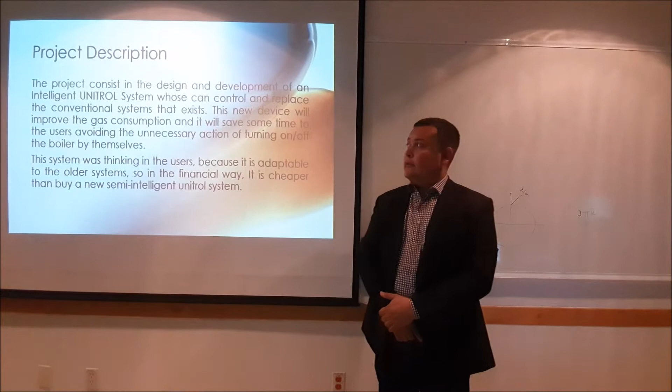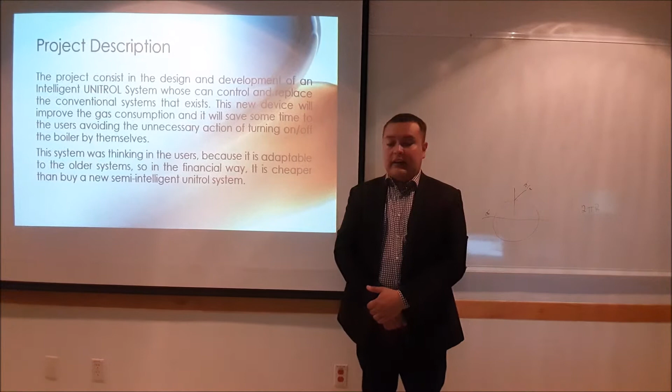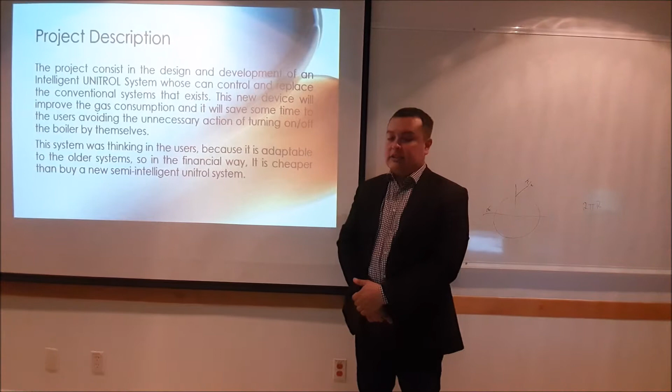Okay, first of all, we are gonna talk about the project description. What does that mean? This project consists in the design and development of an intelligent UNITROL system, which can control and replace the conventional system that exists. This new device will improve the gas consumption and it will save some time to the users, avoiding the unnecessary action of turning on or turning off the boiler by themselves.

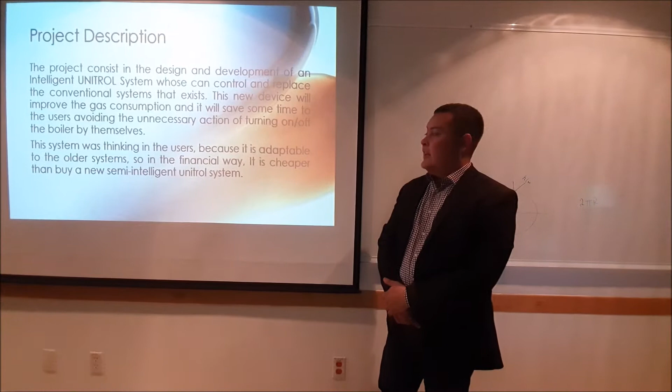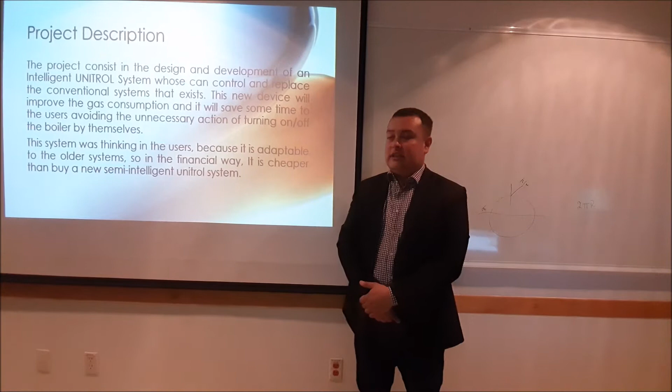This system was thought for the users because it will be adaptable to the older systems that already exist in the market. So that means that in the financial way, it will be cheaper than buying a new semi-intelligent UNITROL system.

Okay, we have different objectives in this project. So the main objective that this project has is the improvement of the UNITROL system for the population. That means that we have to make the old UNITROL systems into an intelligent one. And how are we gonna do that? We are gonna control the system with a mobile device. Actually, that was another objective. Another objective is to learn how to generate energy from the temperature differential.

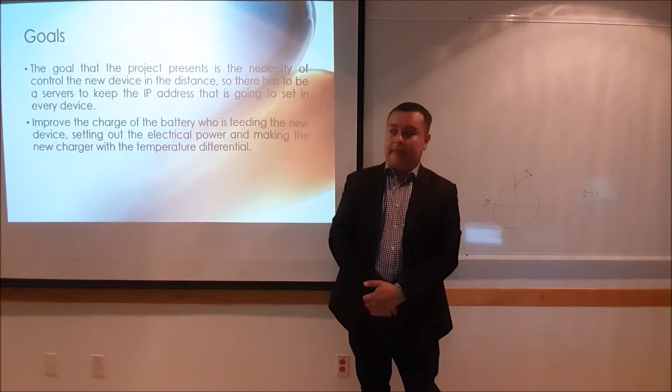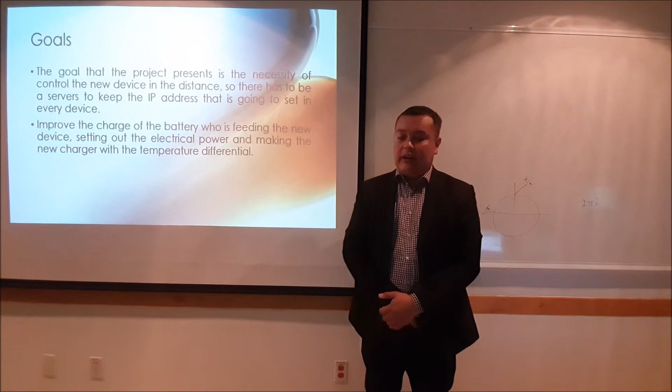As we have objectives, we have goals. So the goal that this project presents is the necessity of controlling the new device at a distance, because we can control this system in a local way. But if you want to control it from another country, you are gonna need an IP address. That IP address is gonna be given to the new device, and it will control the entire system.

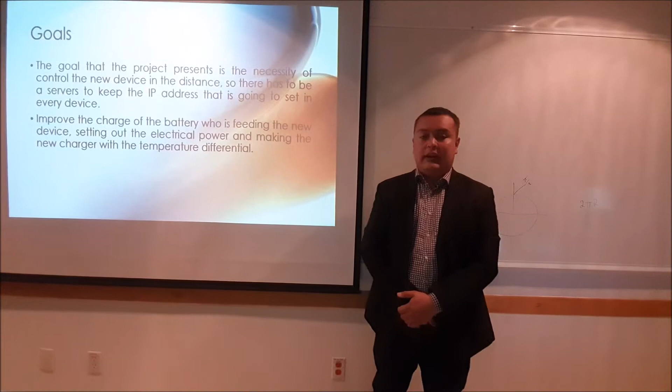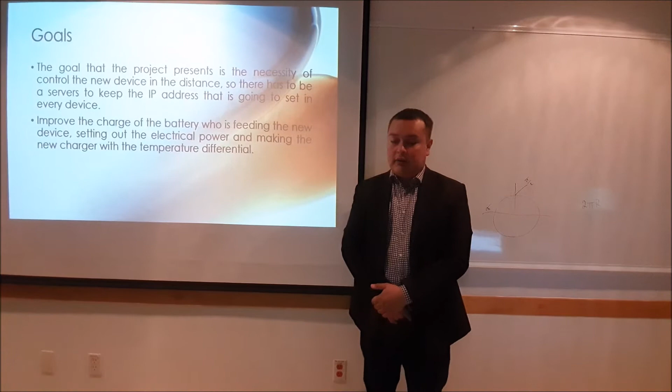Another goal is to improve the charge of the battery which is feeding the new device, setting out the electrical power and making the new charger with temperature differential.

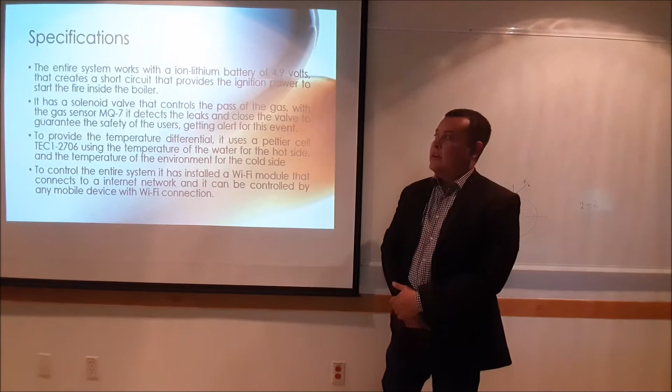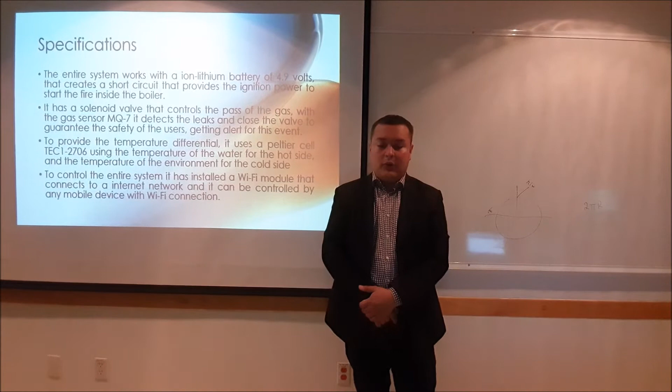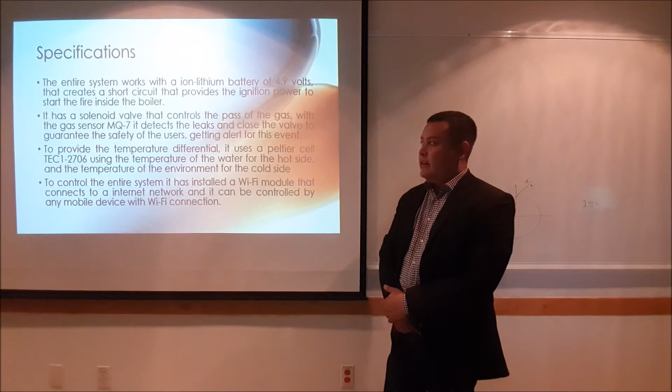So, what about the specifications of this project? This entire system will work with a battery. This battery is gonna be a lithium ion battery of 4.9 volts. These 4.9 volts will create a short circuit that will provide the ignition power to start the fire inside the boiler and start heating the water.

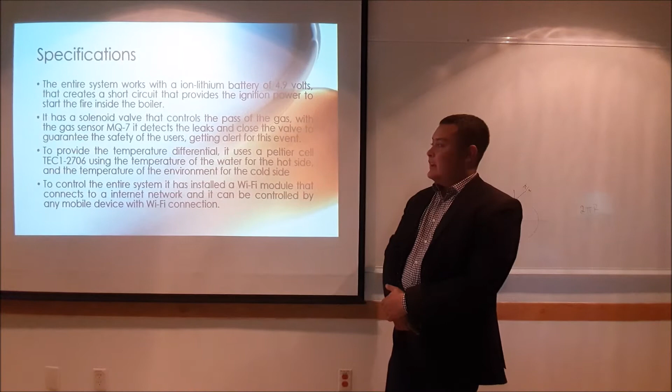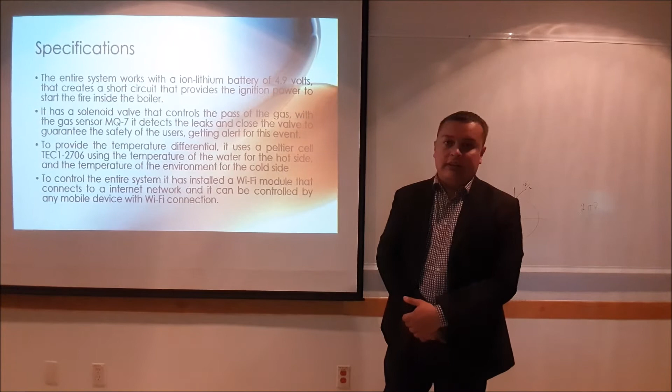It has a solenoid valve that controls the passage of the gas. With the help of the gas sensor MQ7, it will detect leaks and close the valve to guarantee the safety of the users. Then the system will notify the user that there was a leak in the system.

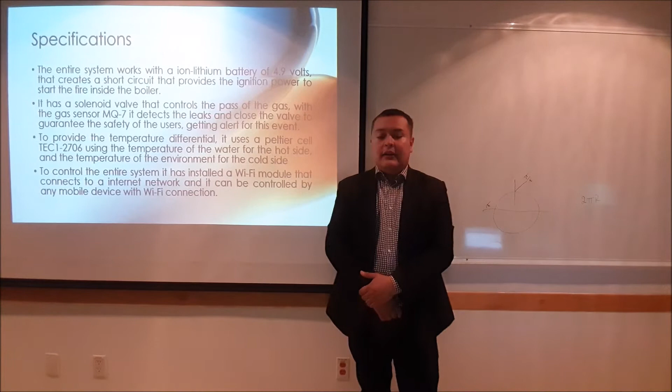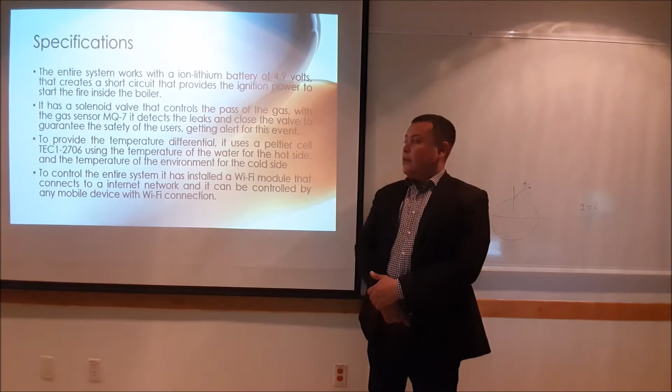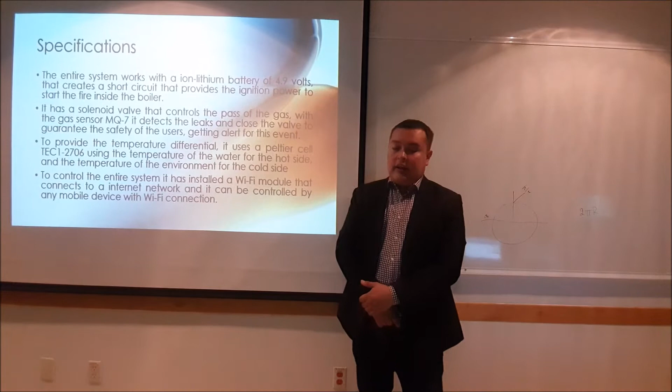To provide the temperature differential, we are going to use a Peltier cell, the TEC1-12706. Using the temperature of the water on the hot side and the temperature of the environment on the cold side will create the temperature differential. To control the entire system, we are going to install a Wi-Fi module that connects to an internet network, and it can be controlled by any mobile device with Wi-Fi connection.

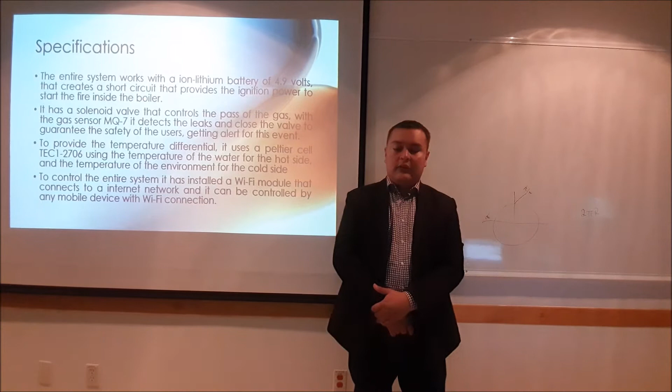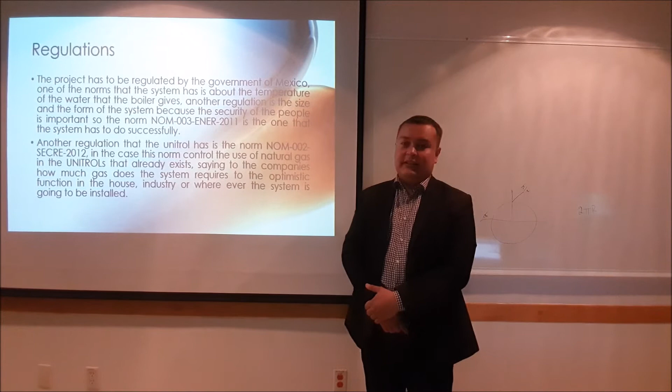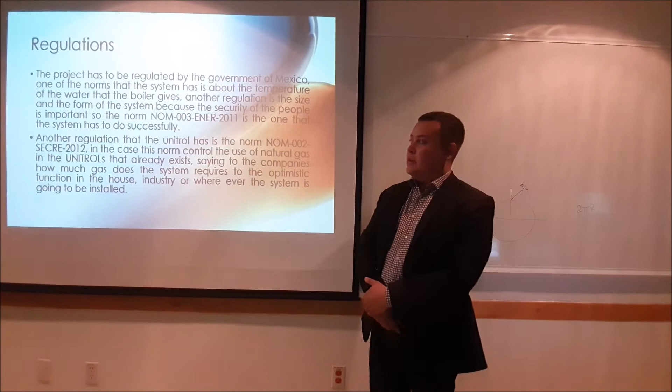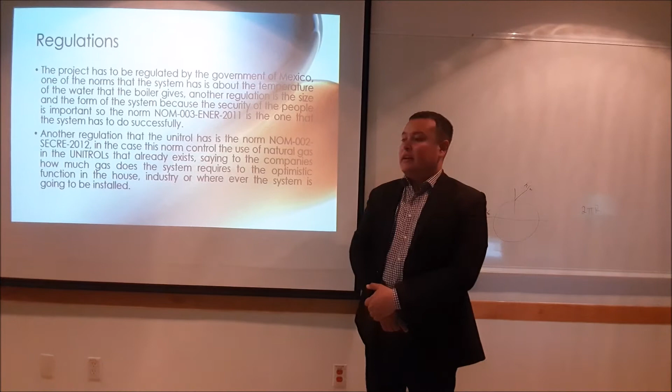Every single project that you are developing has regulations. Our project has a regulation by the government of Mexico. This is regulated by the NOM-003-ENER-2011. What does this regulation say to us? This regulation controls the temperature of the water, because the boiler has to give the users a temperature that is normalized by this norm. Also, this norm controls the security for the people that install it in their house.

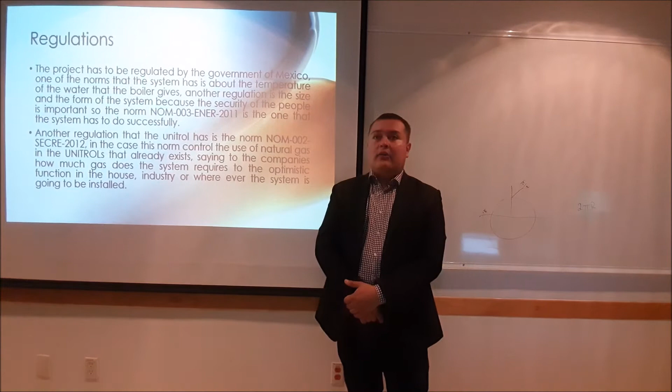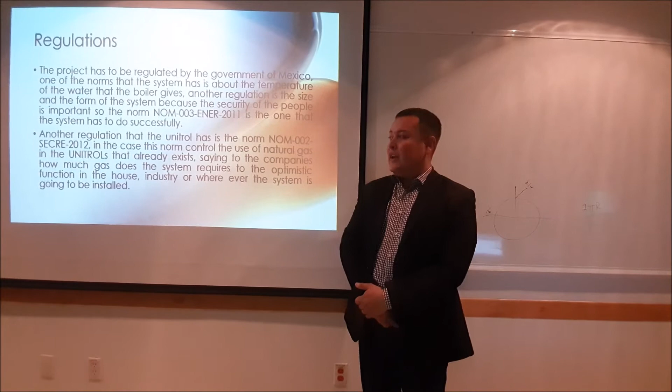Another regulation that we have is the NOM 002 SECRE 2012. What does this regulation say? This regulation controls the use of natural gas in the unitary systems that already exist in the market. So, this regulation tells the companies how much gas the system requires to work optimally. So you can put some gas in your house and another quantity in the industry.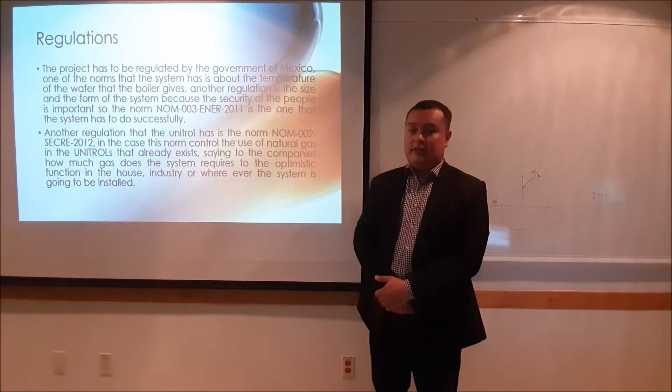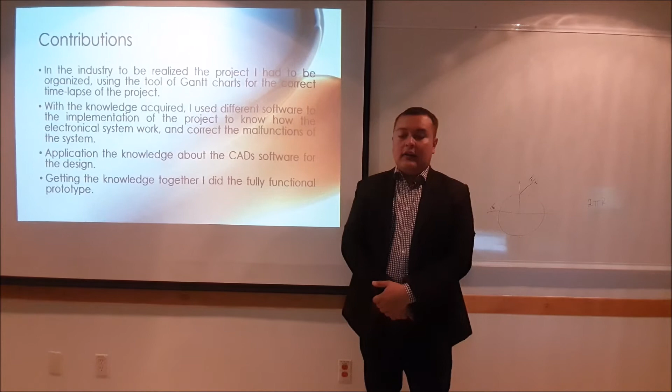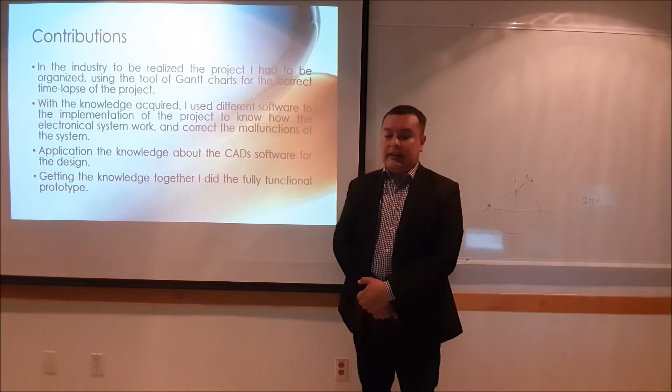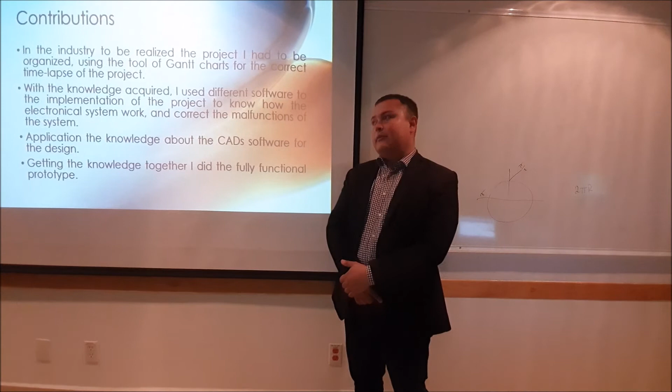What about my contributions to the industry? In the industry, to realize a project, I have to be organized using the tool of a Gantt chart for the correct time lapse of the project. Then, what else did I contribute? With the knowledge acquired, I use different software in the implementation of the project to know how the electronic system works and correct malfunctions in the system. Then I applied my knowledge of CAD software to the design of this system. Getting this knowledge together, I can realize the fully functional prototype.

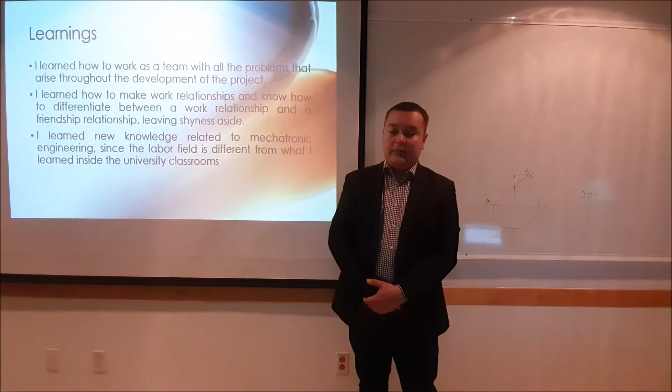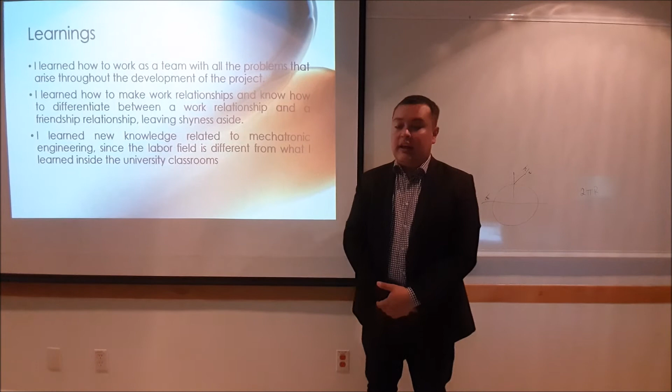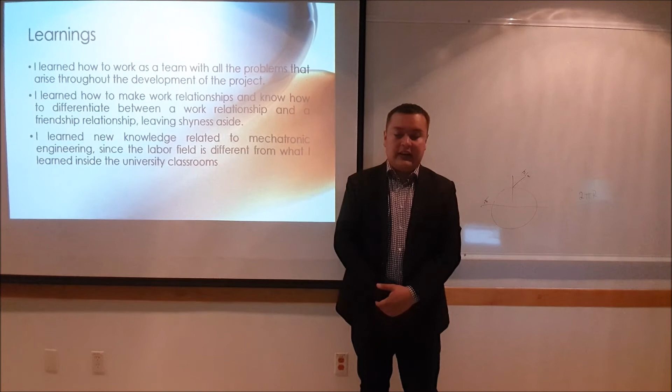What did I learn in the industry? I learned how to work as a team with all the problems that arise throughout the development of the project. I also learned how to make work relationships and how to differentiate between a work relationship and a friendship, leaving my shyness aside. Also, I learned new knowledge related to my career, mechatronic engineering, since the labor field is different from what I learned inside the university classrooms.

Every single report, every single project has to have ethical and professional responsibility. So, I know that there is a problem with the environment. Since I know that, my partner and I did research to reach the best function of the Unitrol system. That is because humanity has to preserve natural resources and use them with wisdom, only when they are necessary. So, this project took care of the ecological footprint, taking care of the gas, avoiding waste and misuse of it.

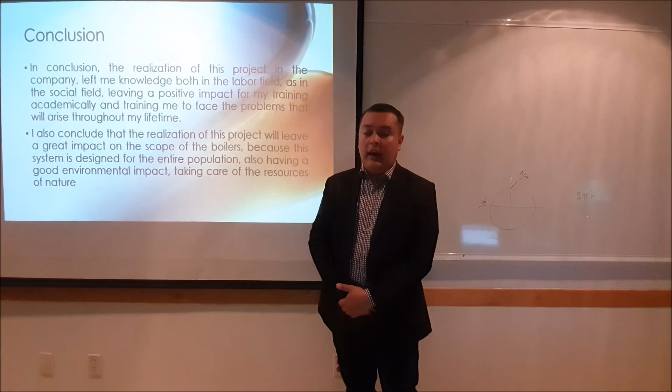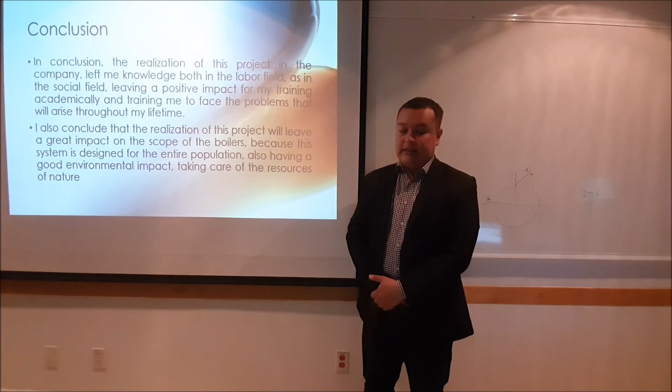In conclusion, the realization of this project in the company gave me knowledge in the labor field as well as in the social field, leaving a positive impact on my academic training and training me to face the problems that will come throughout my lifetime every single day. I also conclude that the realization of this project will leave a great impact in the theme of boilers, because this system is designed for the entire population, also having a good environmental impact, taking care of the resources of nature.